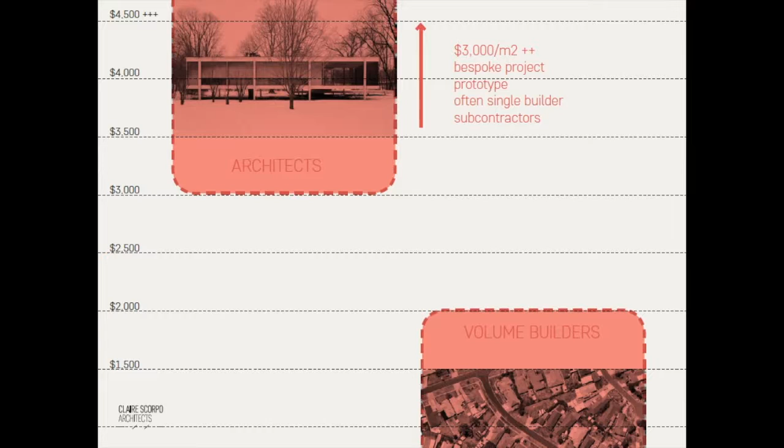The reason is these are bespoke projects, so most residential projects architects are doing are one of a kind, prototypes that have never been built before. You're basically setting up a small factory on the site. Often with single housing, there's one builder with their own subcontractors, which again is not the most efficient system, and you're paying a high premium for those trades.

So there's this gap between the two: volume builders running to the floor in terms of cost rates, and architects that are sky high, the art of beautiful work. But there's a middle ground of opportunity I think could be fleshed out a little more, and there are ways maybe we can investigate that.

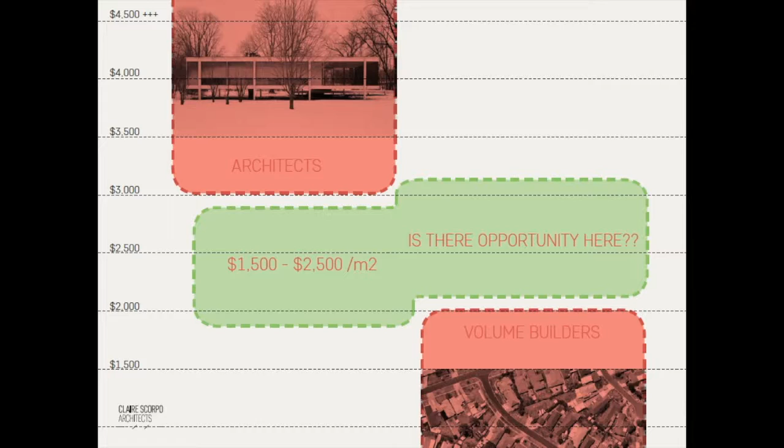Just a very brief thing - I'm a small practice, so understandably not many people have heard of me. We've been operating since 2014, so it's been a couple of years, doing a mixture of residential, small commercial, and starting to do a little public work, but all tiny scale stuff.

When you look at the work we've been doing, we've worked on 32 projects and built 14. The main bulk of those are in residential alterations and additions - not new residential, just the little add-ons that happen to existing houses.

These are just a selection of some of them. Especially when you're a starting out practice getting this kind of work, your budgets are tiny, so you've got small budgets for these clients. The housing is very bespoke, working with an existing house that will have all sorts of issues - you'll never get a lovely, fresh, clean existing house. It'll be riddled with something.

Clients generally have pretty big expectations on what they want. It's often their first project, and they go to a young firm that's interested in doing this work, because that's our bread and butter when we start out, and how we can start exploring doing more work.

It's kind of a folly, because these small projects are possibly one of the hardest projects you can do. Working in bigger firms previously, there's a whole range of issues. There's always difficulties in what you do, but small projects, there's no meat in them. You've got to be really erudite in what you do. There's very little room for error, and it's high stress.

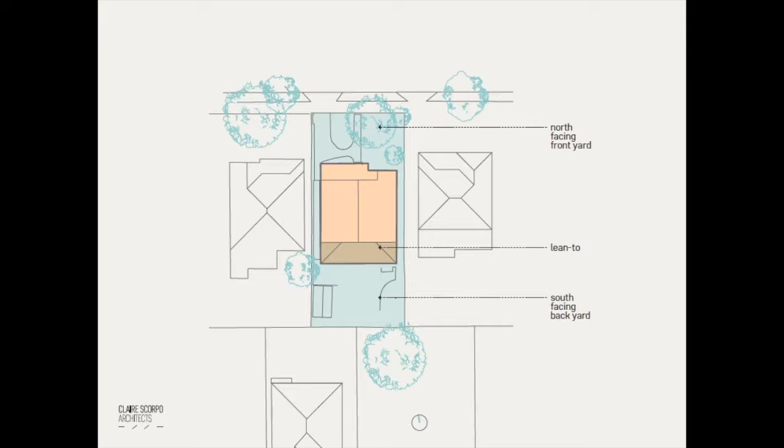Typical double-fronted house, detached, so got 1.5 metre access on both sides and pretty even front and back. It's got a south-facing backyard, so the existing house had very little light, and we were really trying to address some of these issues. And like so much housing in Melbourne, there's the existing house, then a crappy little lean-to that's been added on by someone with a hammer.

So I wanted to think about a strategy before we even started designing, again wanting to mediate the stress. We just thought of the idea of taking the existing house, doing minimal work to that, ditching the lean-to, then adding a really simple new volume. Now the cheapest volume to build is a rectangle, so the simpler your overall envelope is, the less expensive it's going to be to build. So we thought, let's just keep it simple, let's do a rectangle.

Then to kind of add with that, and take away that - you know, end of the project, how much is this going to cost? We thought we'd get a fabricator in really early and speak with them about efficient systems. So we thought about this volume, how are we going to construct it? We spoke to these people, Timberbuilt Solutions, who are timber wall frame manufacturers. They've got a big factory, they CNC cut everything, and it's very efficient, and you can get pricing really early. So we thought, let's use them, let's do this simple idea.

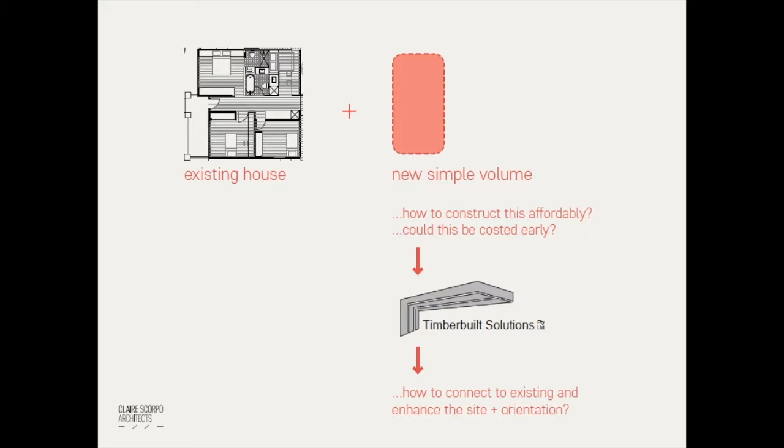How can we do something with this? So we went through a series of processes and steps in how we engage with the existing house and also the site. So we've got the original house, take off the lean-to, we add the new block. At first we just bash it into the existing house, which is not a particularly lovely situation. We pull it out to create a courtyard space in the middle, orient it around so it faces north, and then link it in with a library.

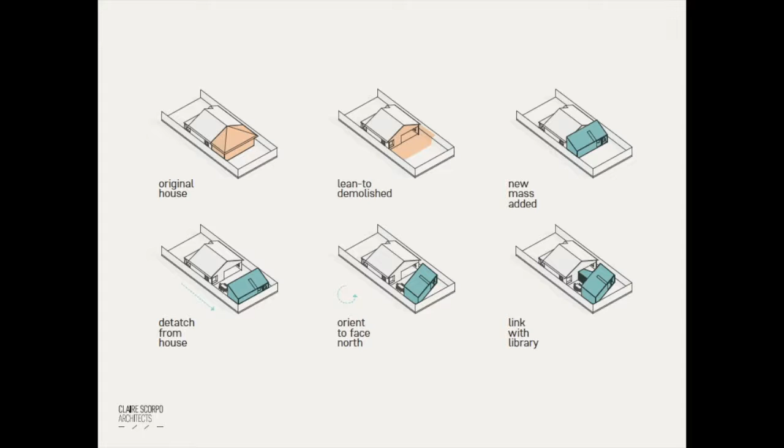So there's a couple of little moves, using that box, but creating this idea of a link that almost operates like a hinge between the existing building and the new. The interesting thing we really want to encourage is the landscape, and how we can do simple architecture but rely on that landscape more.

Part of the skewing of the box was this idea of creating three courtyard spaces in between, and these courtyard spaces all had an identity. One was for dining, very specific, adjacent to the kitchen. The back one was for the kids, with a whole lot of junk and cubby houses, their own play space.

In between what is the study and the new wing is a little shady courtyard, so it gets very little light, but we want to use that quality, and it sits adjacent to a little reading nook. So it's really about trying to let the landscape do more work and the architecture be released a little bit.

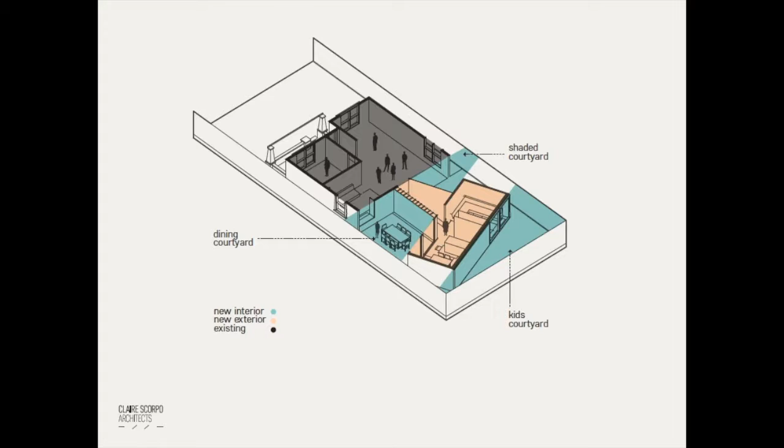The other thing in keeping it simple was the form, so we just went with a simple skillion roof, and that again was angled up so we got as much northern light in there as possible. You can see its relationship, I suppose, with the existing house and the library.

So this is a little model we made. We make a lot of models in the studio as a way to test things at a certain scale, and really focused on the idea that we're interested in this systemised kind of construction method.

Using a modular component, thinking about the site and the way it responds to the site, orientation and light, and this idea of how much of this has to be constructed off-site and how much has to be constructed on-site.

We don't have the ability to be a greenfield site where we can bring the whole thing and sit it there and it's going to be perfect. You're negotiating with an existing building and there's all sorts of issues there, so it's really how much can we build off-site, how much can we build on-site.

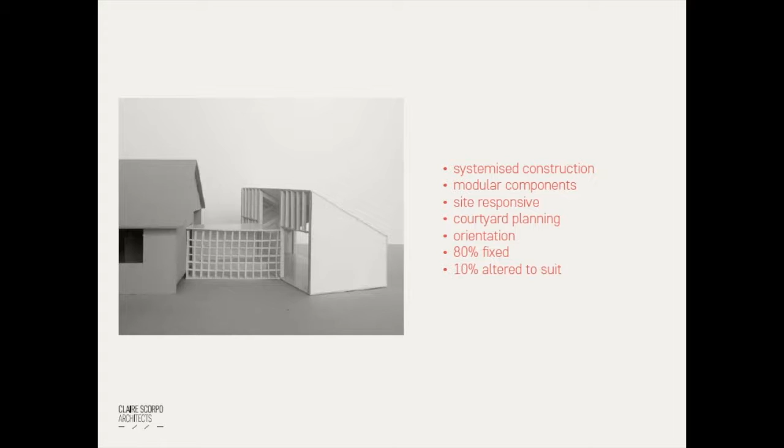So we came up with this idea of it being 80% fixed, which is a block volume, and 10% altered to suit. So the link in the middle, being the library, is that 10% that's modified, and the big block is the other.

So we sent it to these people, Timberbuilt, they're lovely, and they came back - we sent them a Rhino model - with an initial structural model showing all the structure that was going to be included. We also wanted to make sure it stayed cheap, and part of using them was so it would have no steel in the project - it's all laminated timber beams, so it can be constructed pretty quickly and doesn't need another fabricator.

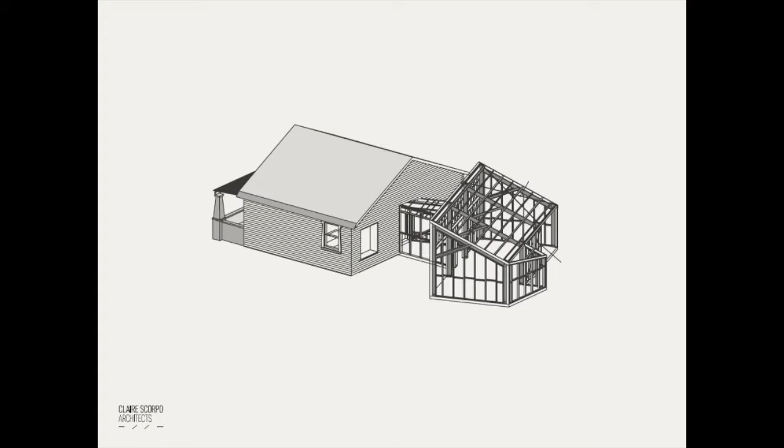So we got this model back, and also really thrashed out the ideas and the final finishing with them early on. The structure actually is the detail in this project, and we really wanted to make sure that was the strong point.

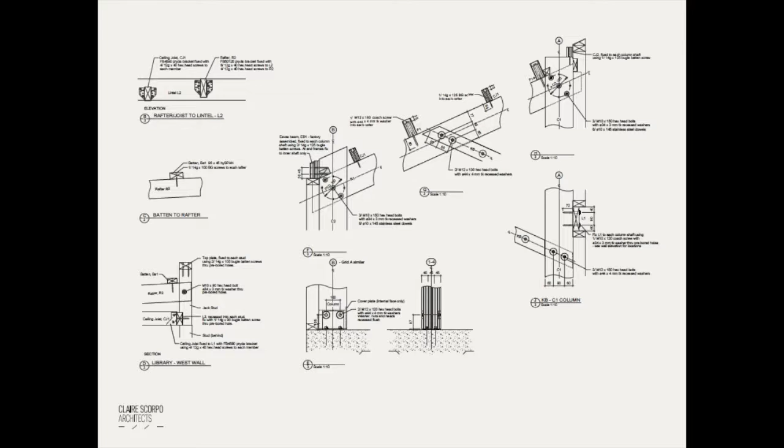We were able to look at what kind of bolts we were using, all the connections, and all those things were developed in detail with them before the project was even on site, at an early phase, which was really great.

So benefits in this being that it was pretty short in terms of build time. The actual frame was put up in a couple of days, and everything was there - there was no cutting on site, it was all pre-cut, pre-drilled. All you've got to do is put it together like an IKEA bit of joinery.

In terms of materiality, we wanted to keep it efficient and affordable, so we used a pretty basic suite of materials. The cladding for the whole thing is polycarbonate, which is a relatively industrial product, though you see it in architecture as well. It's way cheaper than glass, you can insulate it, and it allows lovely light to come in.

The actual structure is all expressed so that it provides the detail, with ply sheets to the interior. This is more expensive than plasterboard, which is the cheapest thing, but we wanted to bring some quality and depth into the materiality. So that was all standard sheet sizes.

The concrete was just a burnished finish, left as it was, and the structure's pretty clear. The light that comes in is really lovely, but things like the kitchen joinery are all laminate, so we tried to pull back budget there.

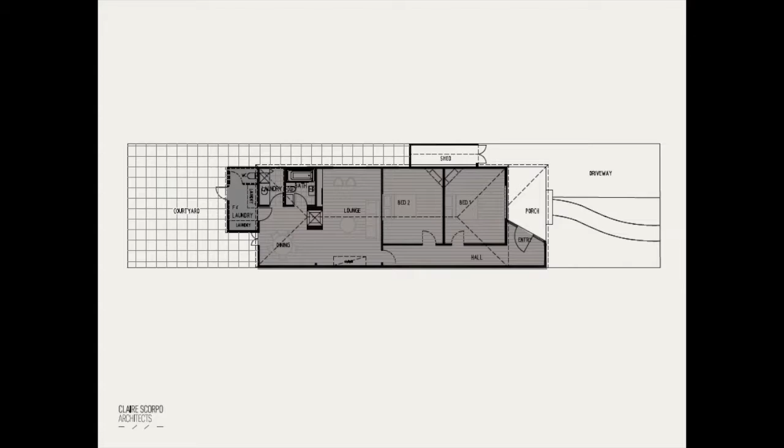Basically what they wanted to do was refit that little laundry and make it a new laundry, and we thought maybe we could do something better without spending too much more. We're a bit opportunistic, so we thought we could take that off and think about a similarly sized micro addition to this house.

We looked at replacing that tiny lean-to with something more activated that could engage with the public life of the house and the garden, which is north, perpendicular to that angle cut. So we added this 9 metre squared addition to the end of this brick house.

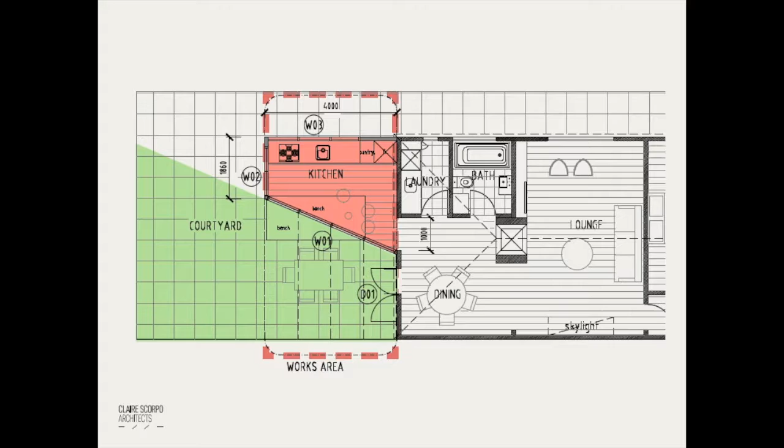We're really trying to keep that work confined. I think we tried to use landscape a bit more to really make it feel bigger than it was, and the angle helps open up that courtyard space and bring it all in.

The other thing we were conscious of was, in such a mean plan size, where do you get a sense of space and volume? So we looked at the importance of a vertical plane - it's very high, which reflects the existing house, but very compact in its footprint.

This carried on over to the external space, and in a way we really wanted to frame that external space so you could feel the volume of the outside as opposed to it being just an open canyon.

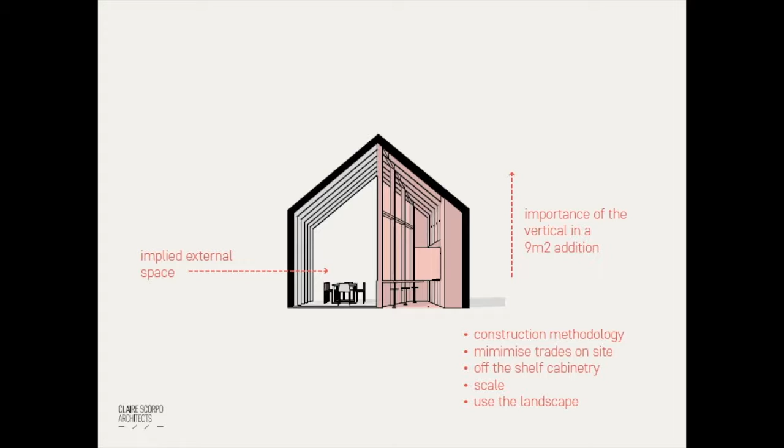We thought we'd go to these timber build people again because we liked them and had a good experience. So we sent them the plans to see if they could do this in prefab, and get that as part of the process early on.

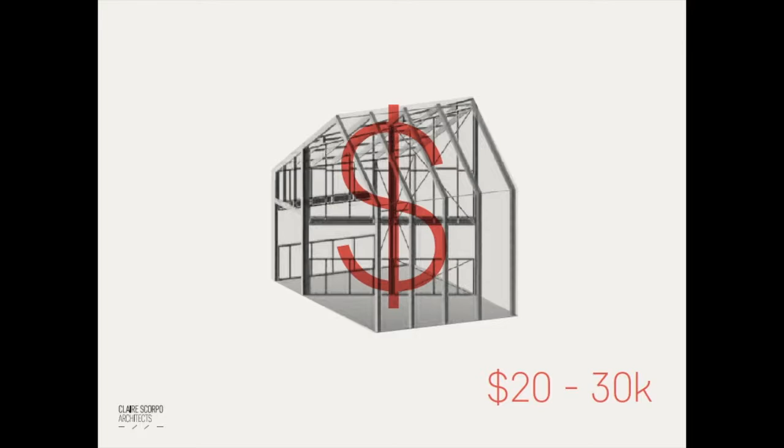This didn't work so much - it was about 20 to 30 grand just for the frame. It's tiny, so it didn't stack up; it was the wrong scale and didn't have that kind of efficiency that the other project did. So that was a shame.

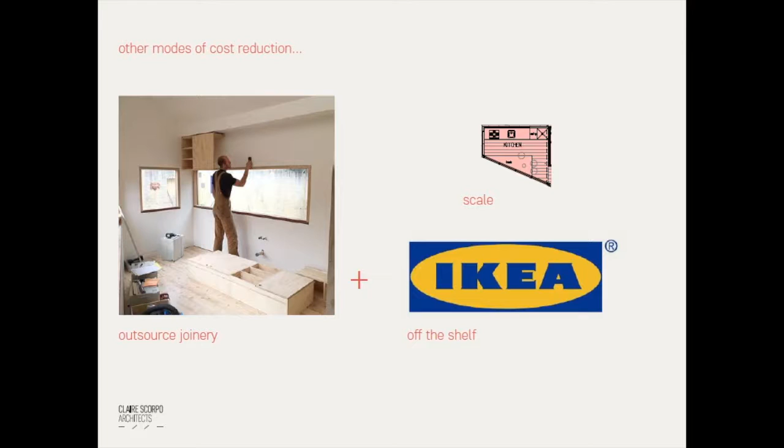We had to move on to other things, so instead we minimised the trades - we used IKEA joinery throughout and got a furniture maker who does little ply things to do the shelves. We tried to minimise on some of those things.

And using the ply because it's got a little bit of depth to it, as a way to transition the service spaces into the kitchen areas, and the qualities of those come through there. So, yeah, that was good.

So we had these two projects that we thought had some ideas. They needed to be refined - they still weren't really right, but we wanted to see what we could do with them. So, as when you're a student and you don't know what to do, you look back at precedent and think, well, how can we maybe do these better? We were also thinking about what we wanted to do as a practice. A common trajectory for small practices is you start with cheap, small work, slowly get bigger budgets, and then do luxury houses with fancy finishes. But we're more compelled to stay low and stay cheap and think about how we can do it better. That's where we are at the moment.

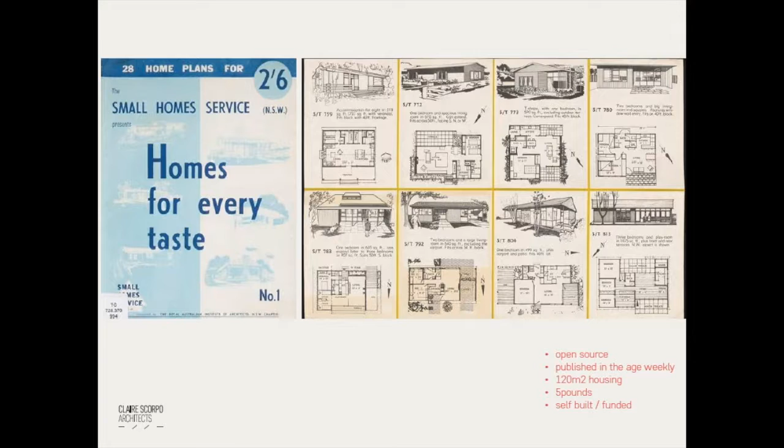It was also important because they were still small - about 120 square metres was the size of most of these houses. They were also flexible; a lot of them allowed for expansion later on. They weren't about giving a set house, which if you think about current volume builder houses, there's no way you're going to be doing anything with those once built. So this gives you an opportunity to enhance, grow, or change it in some way later down the track.

There's a couple of different types of houses - so there were these ones, like the Fler expandable home, which was a good example of more contemporary thinking in terms of planning. Even now, that plan's a delightful plan, and I think it would still work today. It has good zoning, and it's efficient.

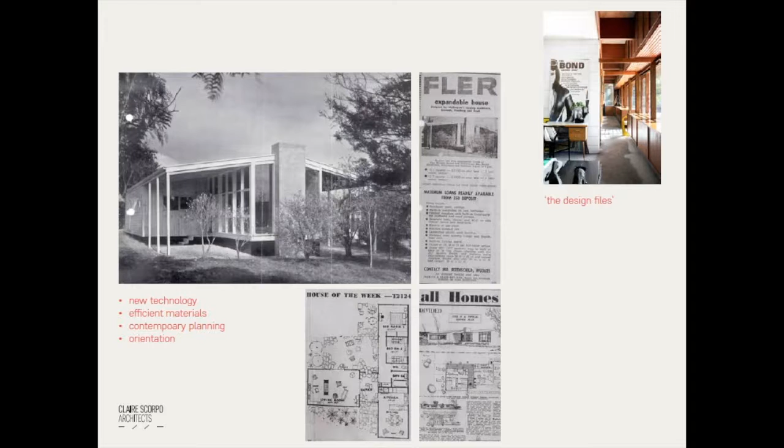It's curious because you look at that kind of project, and now with all the mid-century housing love that everyone has at the moment, everyone wants this kind of thing, and this used to be the affordable housing. But as it was, this was post-war and steel was relatively cheap, so these things could be built pretty quickly. Labour wasn't expensive as it is now, so these kind of things are expensive to build now, so not really possible.

The other houses that were part of this small home service were houses like this. I think it's a T12 house, so it was an iterative, very simple iteration. Robin Boyd spoke about this one being, you know, it's a rectangle, so it's cheap to build. And you look at it from the outside, I don't think anyone would walk past that and say, wow, that's phenomenal, that is architecture. It looks pretty modest.

But you look at the planning, and it's a really efficient plan. It's been well laid out, and the spaces within the house are really good. So we look at a project like this and think, what's good about this project, and what can we take from it?

Some of the ideas are things like the moves in this are spatial, not formal. There's something about the bones of the project. The plan works well, the spaces work well. The materiality doesn't matter. The formal composition is kind of secondary as well. So it's got a lot of humility in it, and there's some lessons in learning that we don't have to always have big, bold moves. We can be pretty modest and restrained.

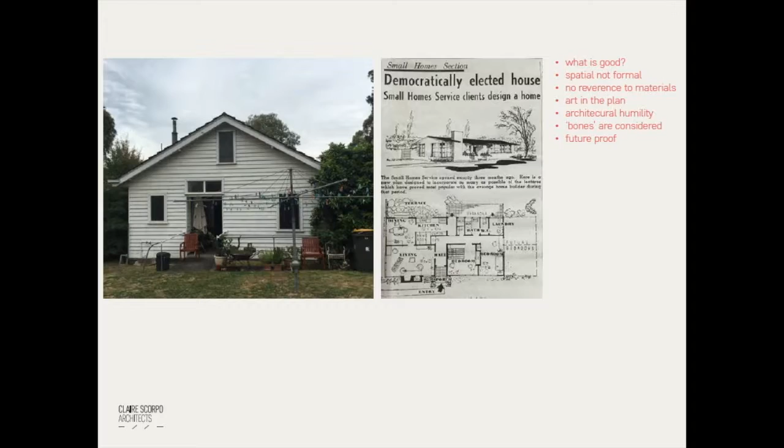So yeah, there are methods and lessons we can learn. Something that has good bones - and I know Kirsten Thompson speaks about B-grade buildings, which I always love when she talks about that, because I think they're quite interesting. The idea that the base, the fundamental parts of it, are really considered, but maybe the resolution isn't to that high level of awards.

So the second precedent I wanted to look at were the merchant builders. They were a bit later, 1965 to '91, and they kind of fizzled out. They were volume builders, so they were actually builders that engaged architects to design the plans for them and use that as a kind of marketing tool. So when you're buying something from merchant builders, the idea was it was a top quality product - it wasn't top tier, but it was still good quality architecture, and it linked architects in. Graeme Gunn is probably the most well-known advocate for the merchant builders.

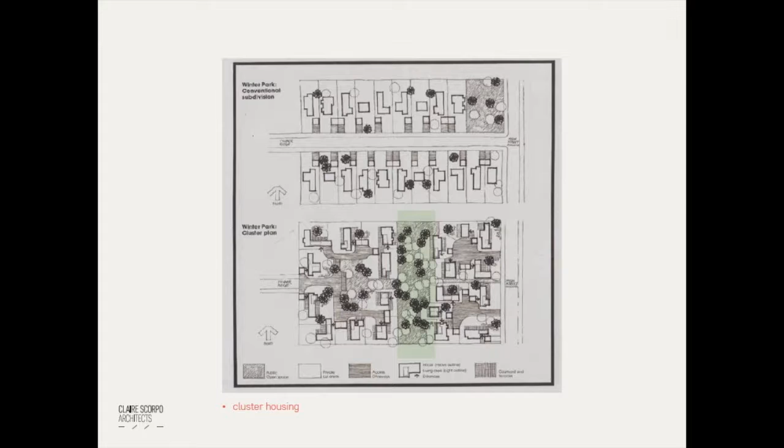Speaking of the agency they gave to the owner, they also looked at typologies as a way to develop their plan. So they had the terrace house typology, the courtyard house, the corner house. They attached this kind of spatial idea to their planning methods. They offered this complete package, and landscape was really well considered in it. So they had landscape architects working for them - Tract landscape architects who are now big, kind of started out with the merchant builders.

They're really well zoned, so again, they've got the flexibility some of the small homes projects had, and they were very keen on orientation. So these were oriented houses.

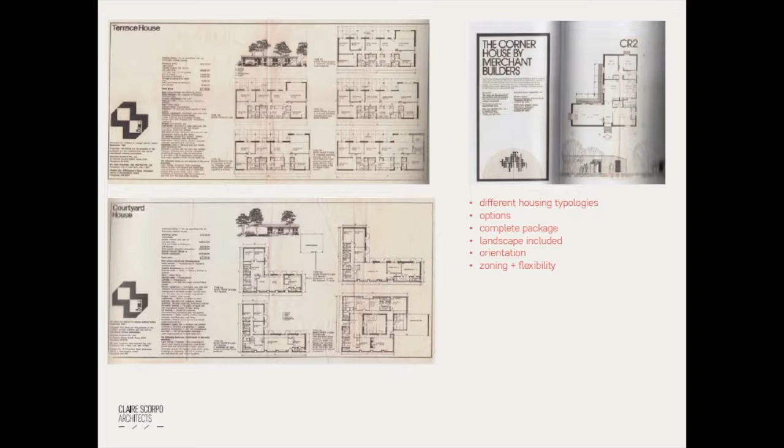Materiality-wise, at the time timber wasn't expensive as it is now, and some of these expressive materials might be more costly to build with, but it was all about natural materials. They were relatively modest, so ceiling heights were pretty small, within like 2.7 maximum, so they weren't voluminous houses, but they very much used things like verandas and eaves to block the sun so they're site responsive and engage with the outdoors.

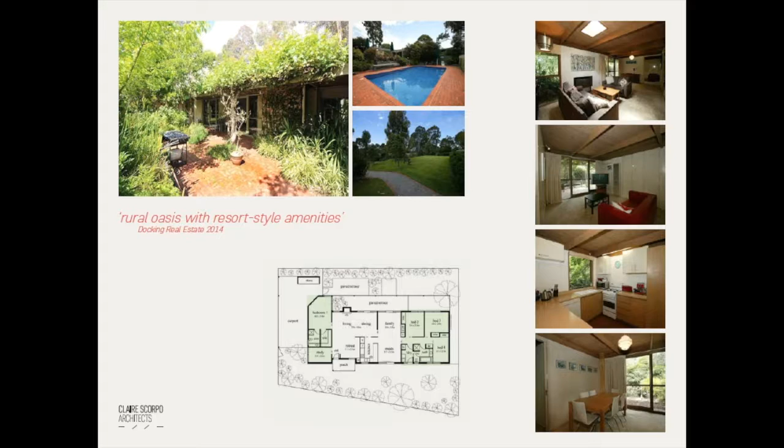As a little aside, I think history is important to think about with what you do. I was obsessed with this kind of stuff recently, and then I thought back to why, and I used to live in one of these houses. It was very efficient and worked well because my nana at the time lived in one end and we lived down the other end, and there was a big pool and a whole lot of people that lived there that I knew. So it was a social environment. Some say it kind of failed, but I think it's still a pretty successful example of how that might work.

So lessons in this, I'd say, the landscape optimisation and really pulling that landscape in. It's this urban plan that they're thinking about structuring, and also the orientation in the planning, as well as a few other things.

The last precedent I touch on is Jorn Utzon, of course the Opera House. He did this project in Denmark called the Expansiva project, which is about additive housing. It started in 1969 and there's several iterations all throughout Denmark of this.

The idea with this is it's modular and it can be reconfigured and replanned depending on the site, so it's highly site responsive. Some of these sites have got lots of slopes and curious terrain. Similar to the cluster housing model of the merchant builders, they really were looking at how do you divide external landscape space.

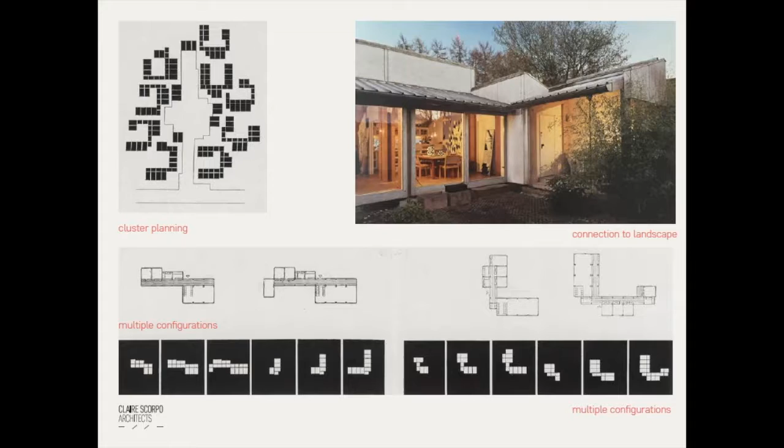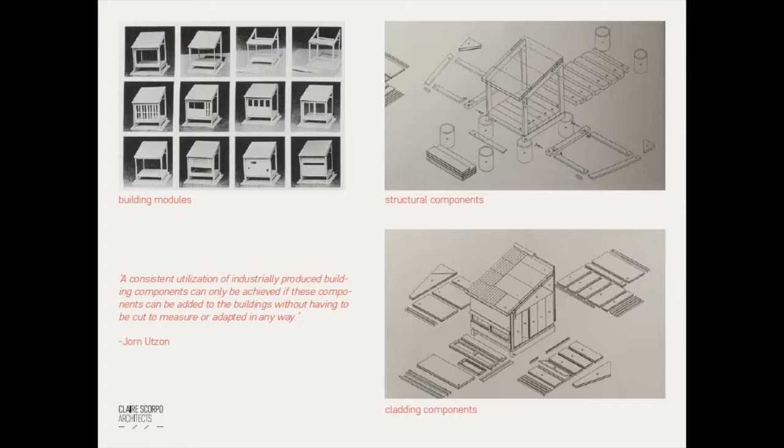It was highly modulated, so the structure was considered, then the cladding components were all moduled, and they went together depending on how the planning went for the house. So the components can be added to the building and they don't need to be cut or measured, so there's a real efficiency of materiality there.

So interestingly, it's that real courtyard planning where they're looking at that internal volume and making that external space part of the house, as opposed to being that green soup that kind of goes around. And the structure is expressed in the interior, so again those elements give detail to the house - these oversized beams, pretty delightful.

So in the end, that idea of systemised construction is something to really look at, and something that's site responsive, has courtyard planning, and really engages the landscape. So there are the three precedents.

Given those, I was wanting to look into a project we're working on at the moment. This is a project we got relatively recently, which is a house in Albert Park - a double-fronted Victorian weatherboard with a budget of $280,000. So what we want to do in this project is pull a few ideas from each of those three precedents we're looking at.

So from the merchant builders, just looking at that landscape or urban figure - how can we plan the landscape to better integrate with a house? From Utzon, we're looking at the idea of systemised planning, so what can be quite rational in this kind of planning that we're doing. And the Boyd stuff, it's humble tectonic - how can we just create dumb volumes but do something with those?

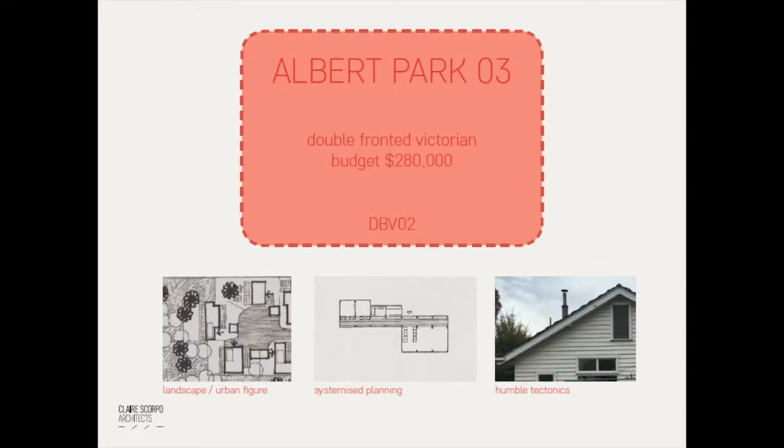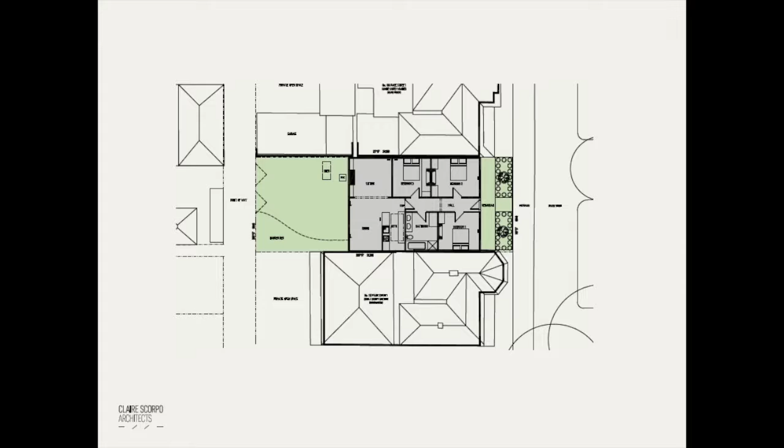So that's the existing house that we're working with. It's got that standard thing where the house is in a block and then a big backyard. I always think the issue with that is, yeah, it's huge and people love saying they've got a big backyard, but your engagement with it is just so singular. You're always looking out on one perspective and that's all you get, and unless you're in the middle of summer enjoying it, you've got this singular perspective that you're always looking out on - you never get much depth to it at all.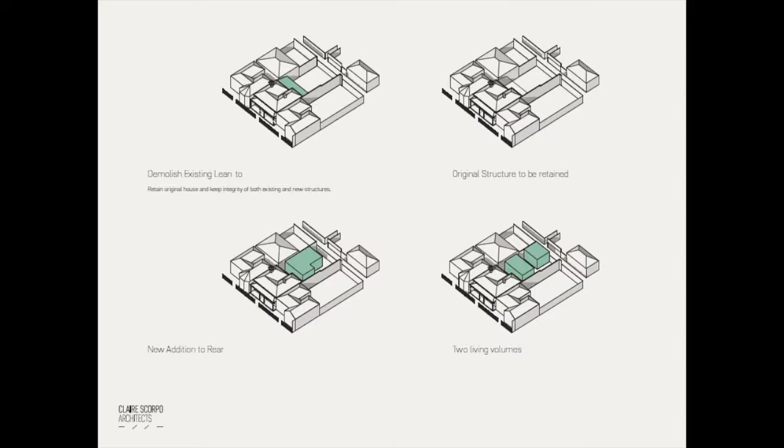So we looked at that site and how we could work some of these ideas into it. Pretty much 100% of all alts and ads that we look at, it's generally demolishing the lean-to and keeping the original structure. Then we think about the volume that's needed for what they require, and then splitting it into two.

Again, we think about solar access and how we can modify these kind of dumb blocks, and then, similar to the Thornbury project, thinking about how we can link them together. So that's the proposed plan as it is now.

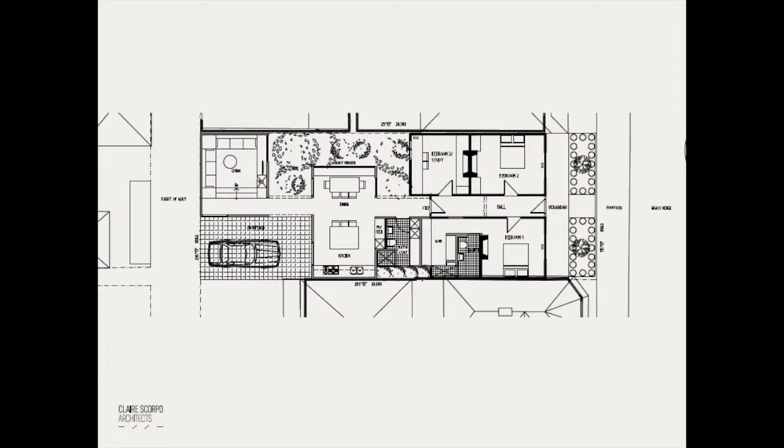Going through it again, the existing house is there. The idea is we're using these two modules, working with Timber Build again, so we've started developing a system for these two. These are two pretty simple volumes on the site.

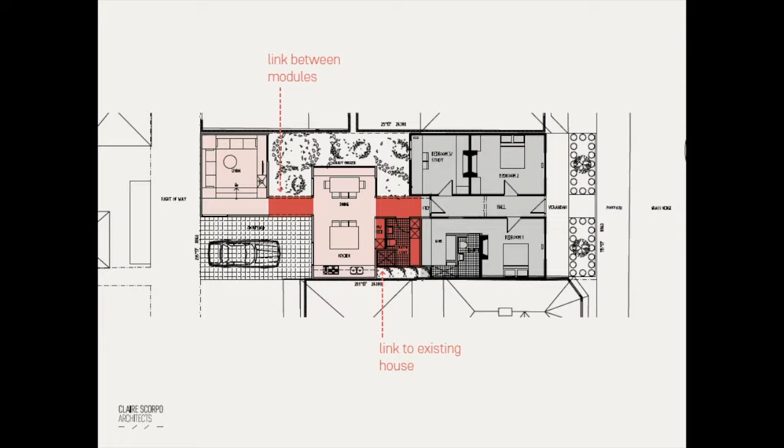Then there's the links to the existing, which aren't part of that same system, so a bit different. Almost most importantly is the figure of the landscape and how that can come in and impact upon the site, even though the forms themselves are pretty square and basic. So that's a little axo of it.

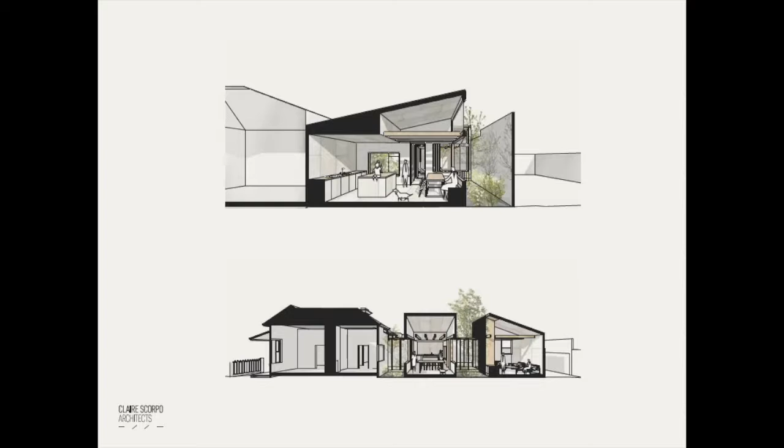These are little sections that show how we can, especially the bottom one, cut up the internal spaces using the outdoors a bit, and what we want to achieve with it.

So we wanted to develop a simple tectonic. We wanted to have a spatial quality as opposed to maybe materiality quality. The idea for the materials is it'll be clad pretty much with cement sheet or something quite inexpensive, and then that ratio of fixed to flexible.

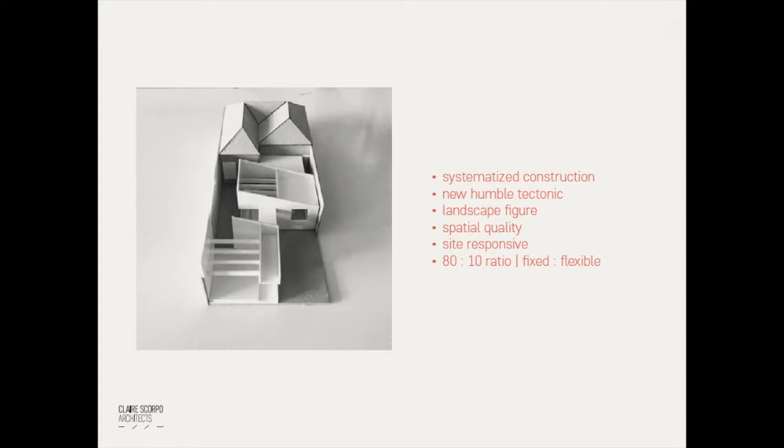So just to finalise, I suppose we're thinking about what this might go on to, and these three projects I presented are each, in a way, their own typology, and that's why I've pulled them out.

So much of the time if you're doing this kind of work in Melbourne, you're confronted with a few different types, and one is that large kind of block. It's a double-fronted house, completely detached. So that's one typology we look at. It's always got the central kind of corridor generally, or there's one that comes to the side.

Then the medium scale is the double-fronted, but without that kind of excess yard, so you're generally building to boundaries on something like that. That last project was one of those.

And then there's the small, which are the single-fronted, often attached, at least on one side and sometimes two. That's got that standard shotgun kind of corridor with all the rooms branching off it. So typical kind of Victorian house.

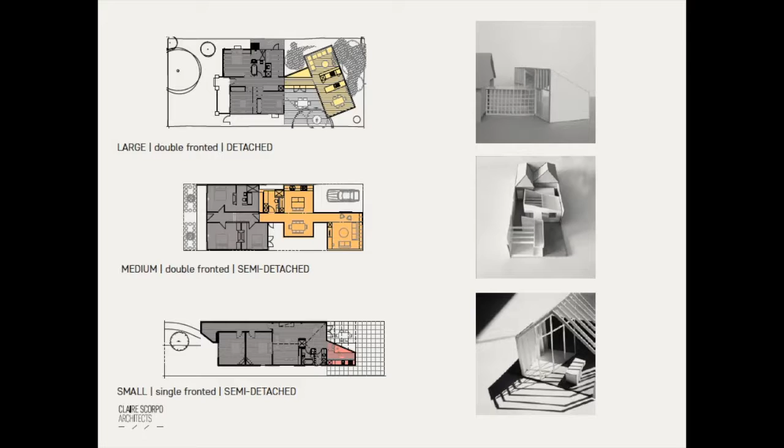So that's where we step back and say, well, what are these in terms of their different types? Then we step back again and look at the other projects we're working on at the moment, and again we can classify them in terms of their different typologies. The double-fronted detached, the double-fronted semi-detached, and the single-fronted semi-detached, and they all have their own kind of quirks in the way that we can work with those.

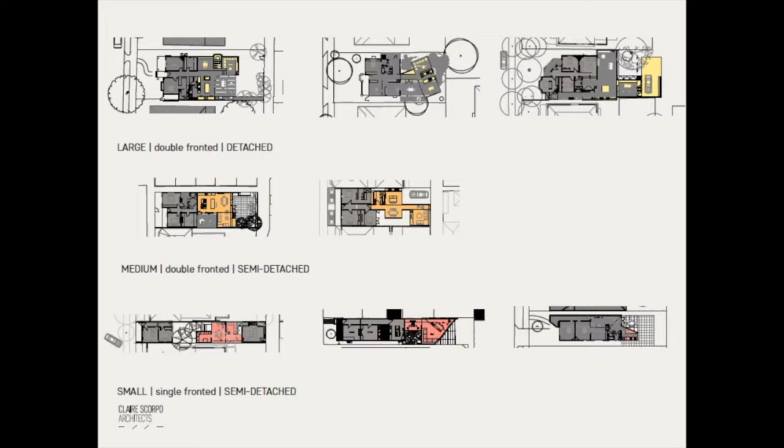It was kind of difficult thinking about how to wrap up something that we're halfway through and working through. So I suppose it poses the question of how we might think about building and designing in a way that's more affordable and a bit more efficient. Instead of looking at these projects as complete individual bespoke projects, how can we step back from that and classify them, thinking of them as iterations of the same thing?

So it's really thinking about how can we bring sameness into these very different projects, and how can we take scale out so we have a clear lens to look over them and try to find all the similarities of these projects, so we can put together a solution that might be applied multiple times as opposed to just once.

So to end, it's looking at that question of how can we make a bit more of an impact. This is pretty small scale stuff, I'm not talking about big buildings or big land masses. It's small iterations at a time, trying to work with what we've got on and how we work, and trying to make it better.

So the idea is how can we make architecture, in some respects, a bit more affordable to the person, and one day we can take it all over. That's all.